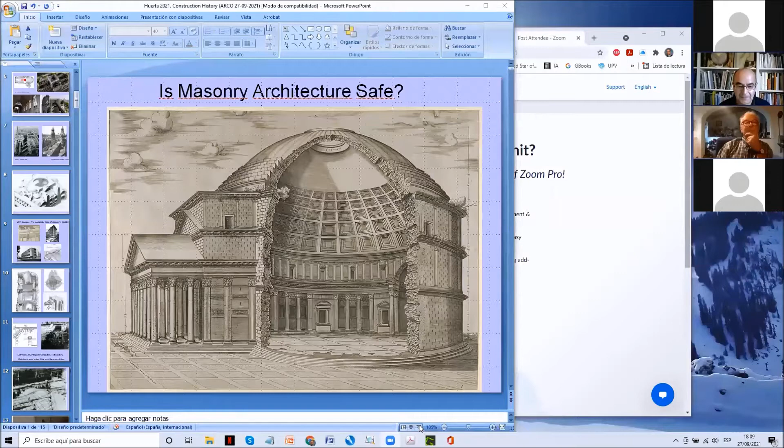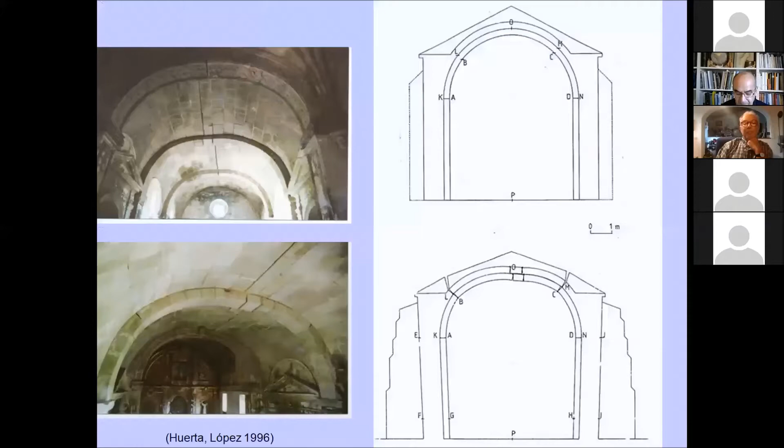Historic buildings have survived for centuries or millennia, and this is an indisputable proof that they are well designed and built. These buildings are robust, and they were maintained with the same materials and methods along history until the 20th century. They have cracked and deformed, and they have withstood earthquakes, fires, and wars. So that these buildings are extremely robust is a historical fact.

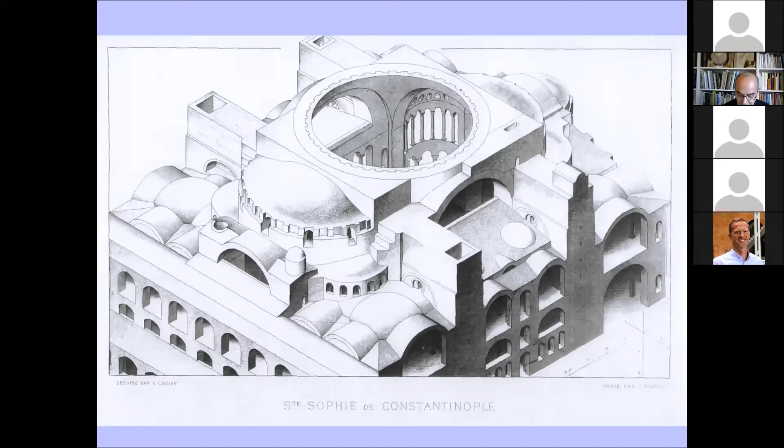However, today, at the beginning of the 21st century, we view these historic buildings, particularly masonry buildings, with great mistrust. Masonry architecture forms a major part of the built heritage, and we should investigate the reasons for this mistrust, which contradicts squarely the historical facts. In my opinion, the reason is the complete loss of the masonry building tradition based on the use of the arch and the vault, which started in the 19th century and culminated in the collapse of the whole tradition in the second half of the 20th century.

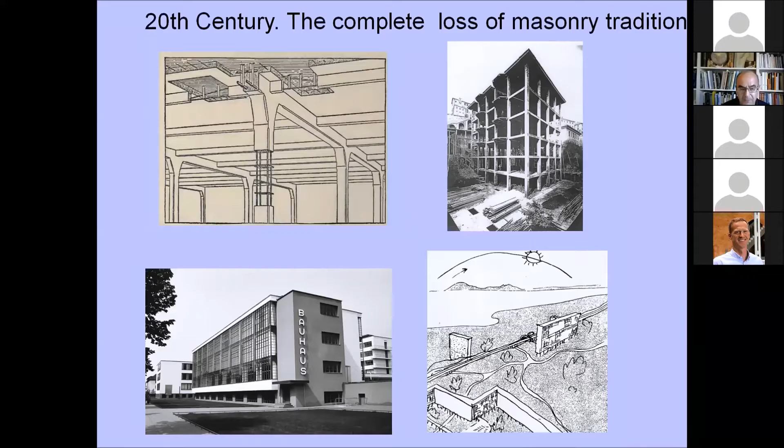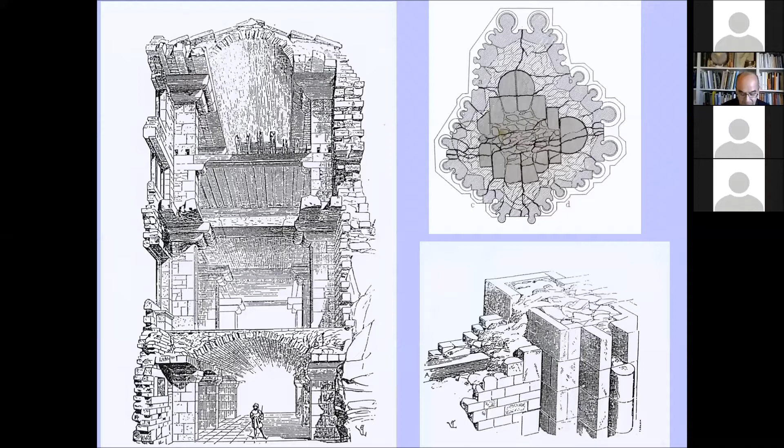The nature of masonry, an orderly stacking of stones or bricks, which is essentially discontinuous and heterogeneous, which does not resist tension, which cracks and deforms in a way that we do not understand now, and which seems therefore dangerous to us, contradicts the framework of ideas associated with modern reinforced concrete and steel structures. Masonry construction seems strange and alien to us. We are ignorant; we do not understand or appreciate the essential robustness of this marvelous construction. Ignorance breeds fear. Fear clouds judgment and leads to wrong decisions. Moreover, fear often leads to an aggressive, defensive so to say, reaction.

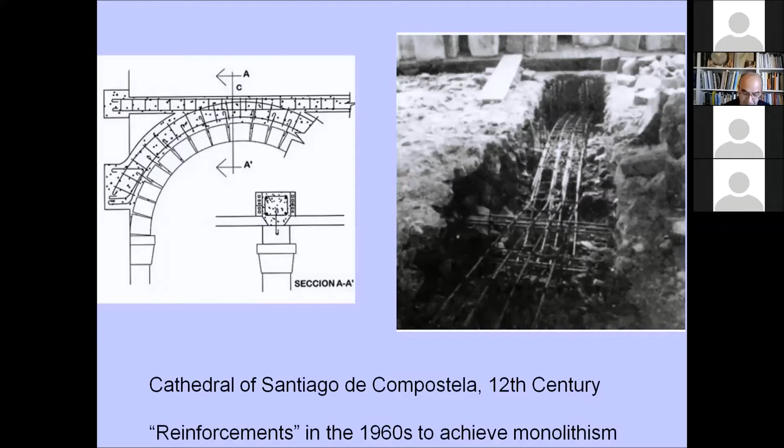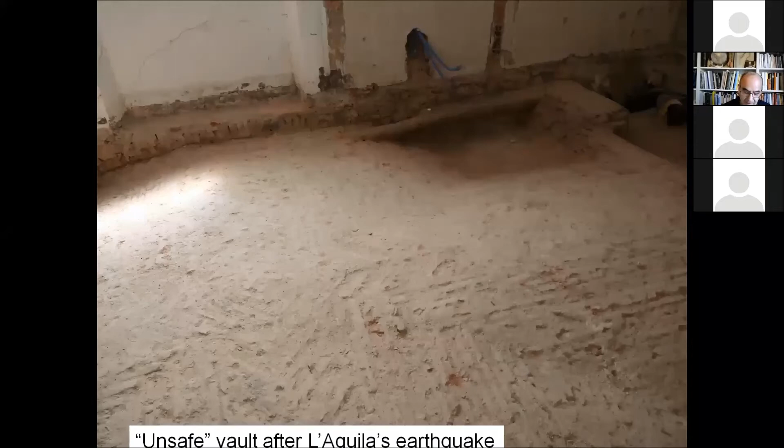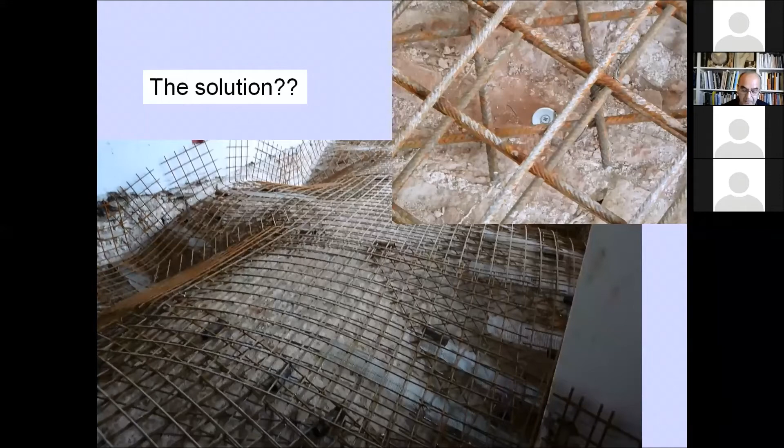Many interventions that are carried out today, often with the best of intentions, actually turn against the monument itself. In reality, the modern architect or engineer unconsciously wishes that the historic structures were made of reinforced concrete or steel, or perhaps now of carbon fiber. The modern architect or engineer would like to prevent the natural cracking and movement of the masonry, to turn the pile of stones into a monolith. Modern interventions seek in vain this transformation, and historic constructions see their essential nature violated by massive interventions of reinforced concrete, steel, carbon fiber, resins, etc.

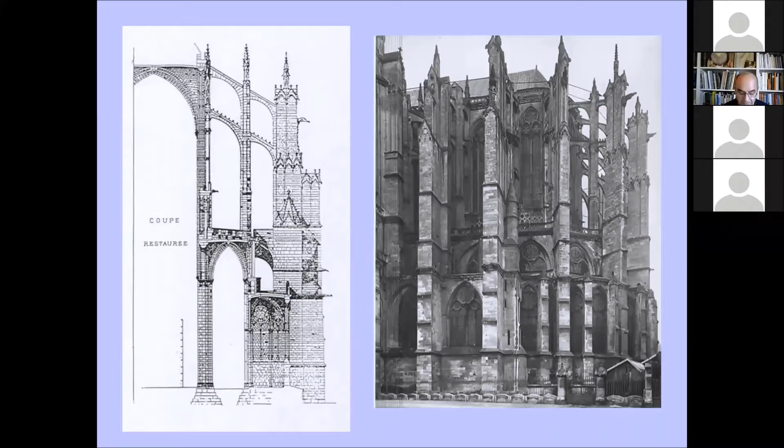I repeat, there is an unconscious desire to transform the masonry, which is the fruit of our prejudice. The prejudice is something which is not questioned. It is in our minds. And this prejudice is that masonry is bad, masonry is dangerous. But as we have seen, this prejudice arises from our ignorance. You cannot preserve what you do not understand. You cannot understand and respect what you fear. And in the last years, many times we have seen that very old structures, some 2 millennia old, like the aqueduct of Segovia, are suddenly collapsing. Maybe the problem is in the head of the architects or engineers and not in the monuments.

We see all too often the consequences of this vicious circle of ignorance and fear, which leads to an aggressive response. Then there is greed for profit and money. Aggressive interventions, besides damaging the monuments, are very expensive and lead to great profits for all those who participate in

them. This cocktail of ignorance, fear, and greed is destroying our monuments, turning them into a sort of Frankenstein's monster. One wonders what will be left of them in 100 years. Will there be any buildings that have been spared these strange aggressions that violate their very nature?

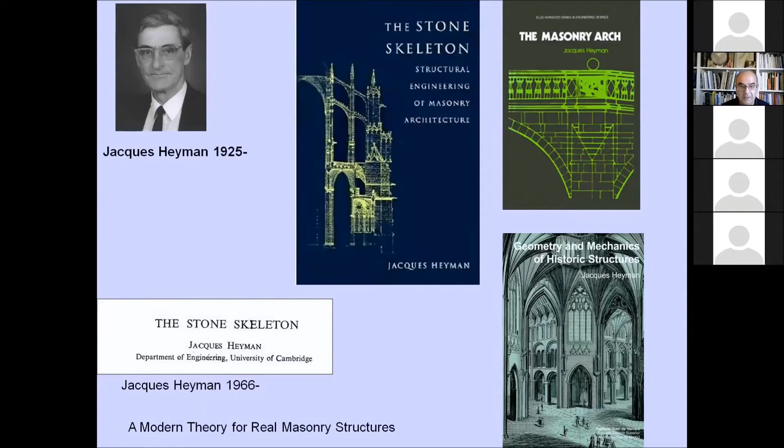But how can we analyze, for example, a great Gothic church if we do not know how it was planned, how it was built, what geometrical rules were used in its design, how its walls were erected, how the stones were chosen and the mortars fabricated, how it is founded, etc. You cannot analyze a historical construction without knowing the history of the construction.

Architectural history books abound, but they say little, if anything, about how buildings were constructed. The history of building technology is, in my opinion, essential to complete our vision of historical architecture, and essential to be able to make progress in recovering the knowledge lost along the 20th century. In what follows, I will very briefly explain the origin of this discipline of construction history and its current state.

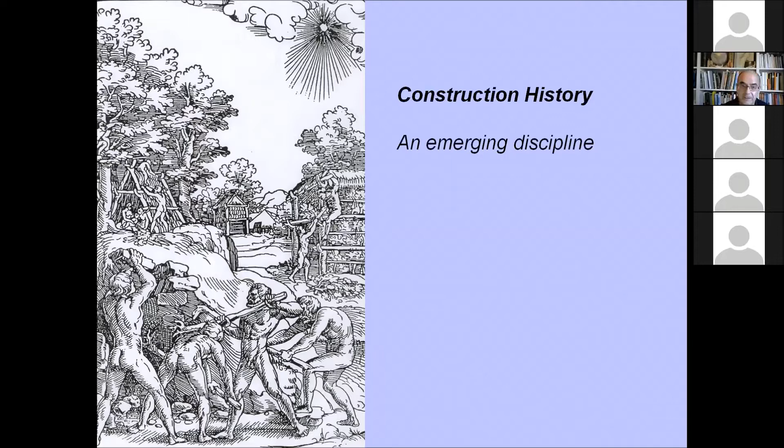Since the beginning of architecture, in every time there was an interest in knowing the methods of construction of previous builders. Vitruvius is based on previous Greek manuals. Brunelleschi, before building his great dome, studied in great detail with his friend Donatello the Roman ruins in Rome. Alberti also gathers a lot of the medieval tradition which was compiled before him.

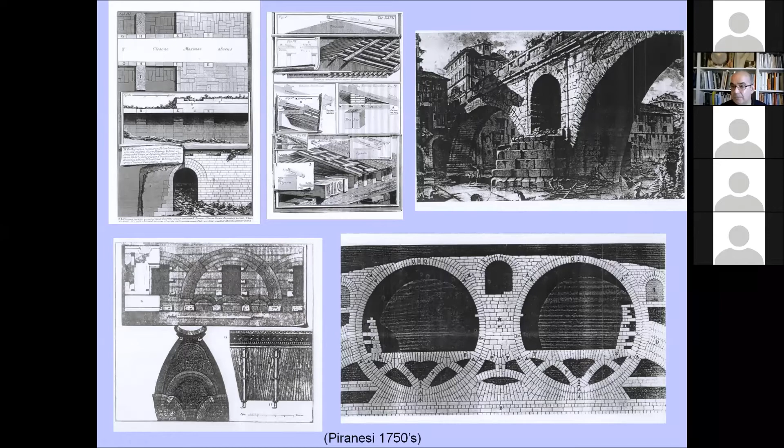One of the first to make more or less right drawings of the Roman concrete was Rusconi, who explained for the first time the stratified nature of the Roman concrete. Piranesi, both of them, father and son, tried to explain in some of their drawings the internal structure of the monuments. Sometimes they invented things. For example, they invented the arches inside the dome of the Pantheon, which we know now don't exist. Terenzio in the 1930s proved that. Also, this structure of the foundations of this Roman bridge is fanciful. But at least Piranesi tried to imagine or to understand the structure of these monuments.

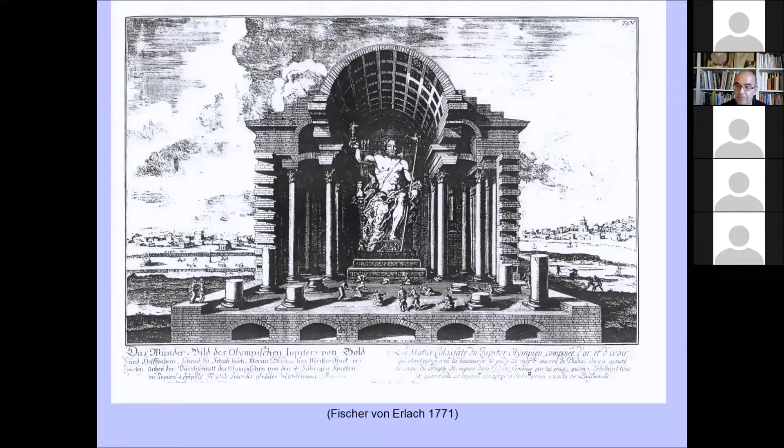Fischer von Erlach, at the end of the 18th century, in what is considered the first book on the history of architecture, made drawings in which we see the same attempt to imagine the internal construction of the monuments. It is along the 19th century that all this tradition is compiled in different manuals, which now constitute an authentic treasure to study the old traditions of vaulting. First, Rondelet, 1802, Traité théorique et pratique de l'art de bâtir. It is also one of the first books which contains whole chapters on the history of construction.

Robert Willis, in 1842, made the first scientific and rigorous study of the geometry of the vaults of the Middle Ages. Viollet-le-Duc dedicated all his life to the study of medieval construction with a zeal and intelligence which is difficult to imagine. In Germany, not so well known, Ungewitter also wrote a handbook of Gothic construction with a detailed description of all Gothic construction in the German area.

And noteworthy also are the additions made by Karl Mohrmann, professor in Hanover, who in the third edition of Ungewitter's manual included almost 200 pages on statical analysis of the Gothic structure, which constitute, from my point of view, still today the best study of the equilibrium of Gothic structures. And also, it is necessary to mention Choisy, L'Art de bâtir chez les Romains, the Byzantines, the Egyptians, and Joseph Durm, Die Baukunst der Griechen, Die Baukunst der Etrusker, construction in Greece and Rome.

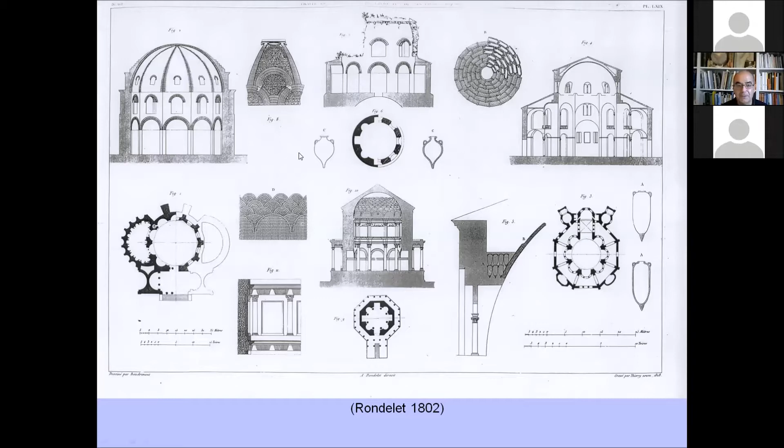Here is one of the plates of Rondelet, showing, for example, the structure of the dome in Ravenna, or repeating the mistake of Piranesi, showing these internal ribs in the dome of the Pantheon, which do not exist, the Temple of Minerva Medica, etc.

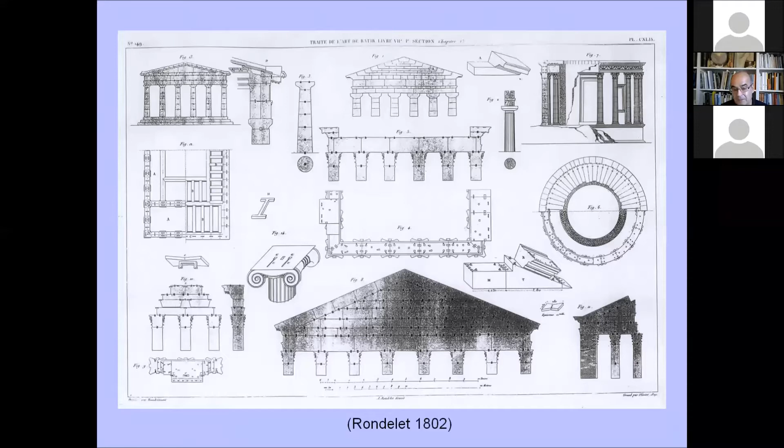This plate also shows the use of iron in the Greek and Roman temples to join the stone blocks so that they wouldn't slide, probably during the earthquakes.

As I said, it was Robert Willis, who was an engineer, a scientist, and the best architectural historian in England in the 19th century. It is worth reading today, more than reading, studying, because it is quite difficult to follow the arguments of Robert Willis with all his analytical drawings full of letters and signs, etc.

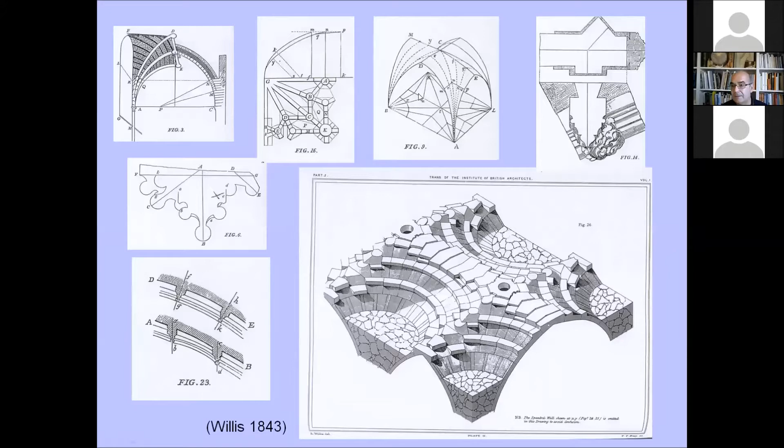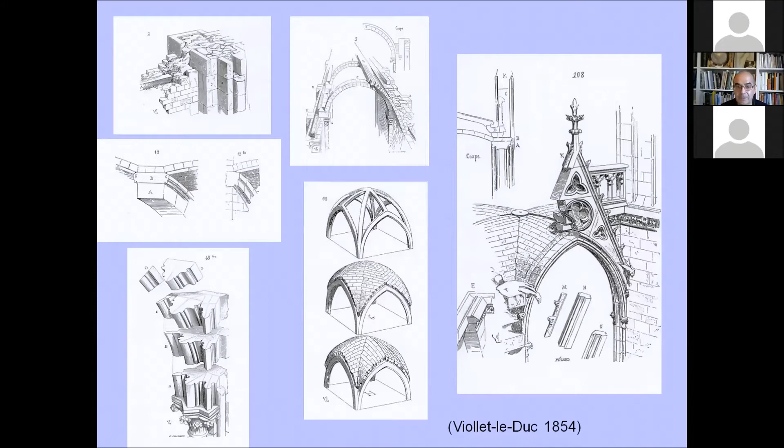And then, of course, Viollet-le-Duc, the most famous of all the construction historians in the 19th century, with his wonderful analytical drawings. Choisy was the first, in 1873, who stated clearly his objective. His objective was to explain the internal structure of the Roman constructions.

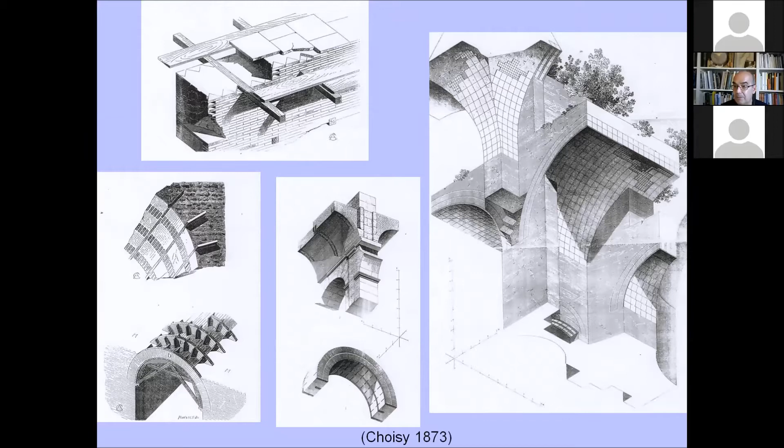And the ideas of Choisy are now common knowledge. Choisy is no longer quoted by archaeologists because the ideas of Choisy have been incorporated in our common knowledge about Roman construction. And Choisy also studied the Byzantine construction with combination of vaults built without centering.

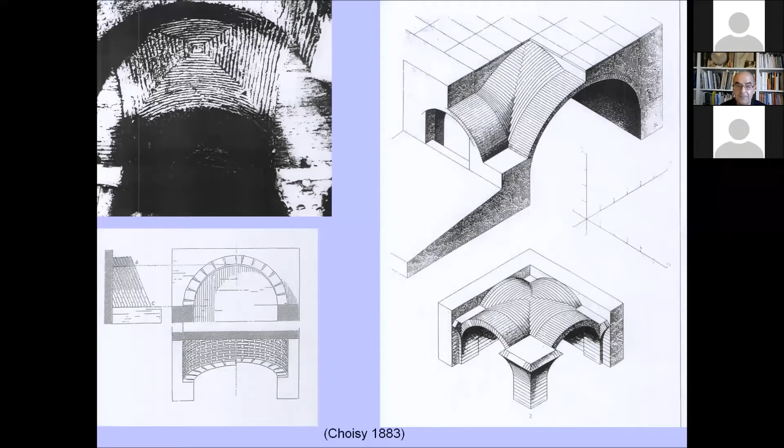Joseph Durm, a Bavarian architect who was interested in the classicist approach. He traveled to Greece and Rome and made these analytical drawings, which explain much better than any photograph the findings and the interpretation of the findings.

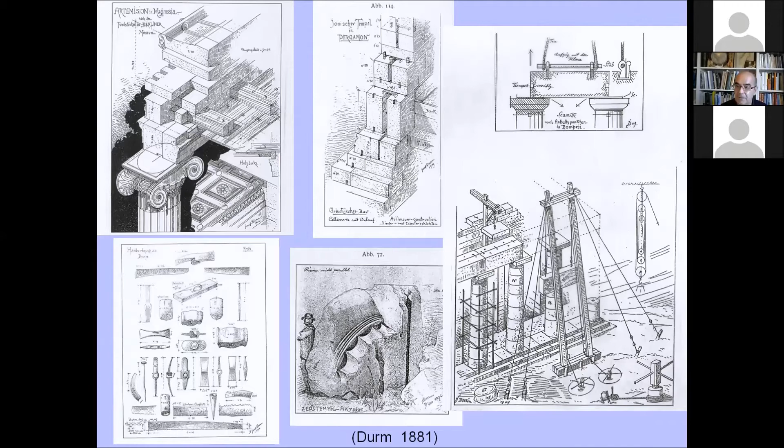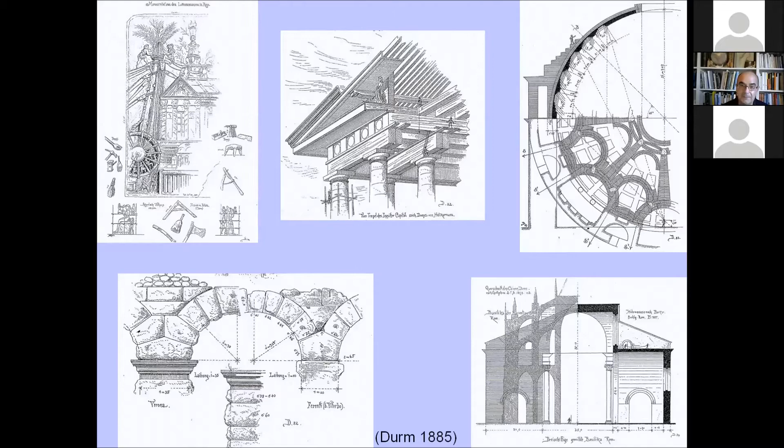Durm also explained the structure with these wonderful drawings of Santa Maria del Fiore, St. Peter's, the Baptisterium in Cremona, in Florence, etc.

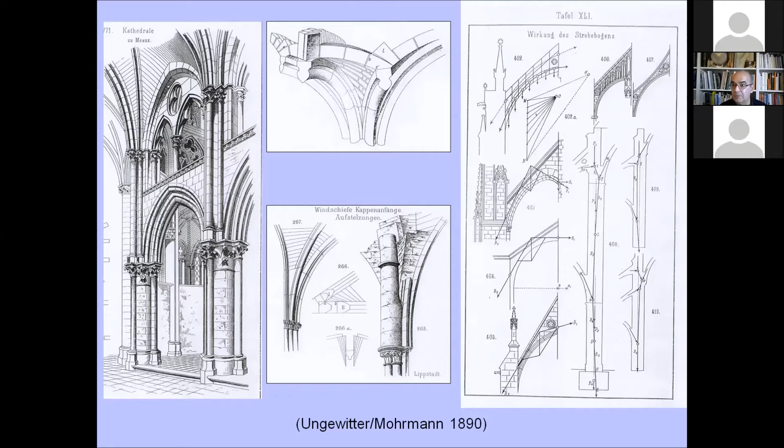As I said, in the third edition of Ungewitter's Handbook of Gothic Architecture, he added almost 200 pages of the third volume to the study of the equilibrium of Gothic structures. And within the frame of modern limit analysis, we know that this approach of equilibrium is completely correct.

We know that this tradition was disappearing during the 20th century, particularly after the First World War. But the traditions don't want to die so easily, particularly the old professors don't want to die, and they want to teach the same things they were teaching maybe 20 or 30 years before.

We have a document in the School of Architecture, which is the notebook of Luis Moya, a notable architect, from when he was a student. This notebook has been preserved, and we found in it the drawings he copied from the blackboard by his professor Carlos Gato. And here we can identify almost every single drawing from Durm, from Viollet, from Choisy, etc.

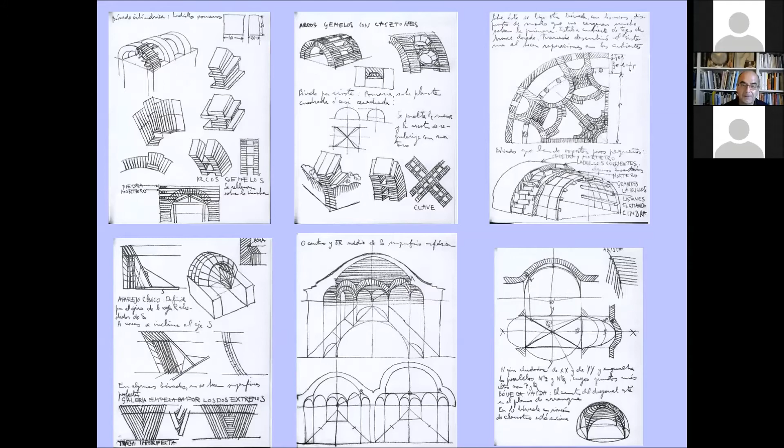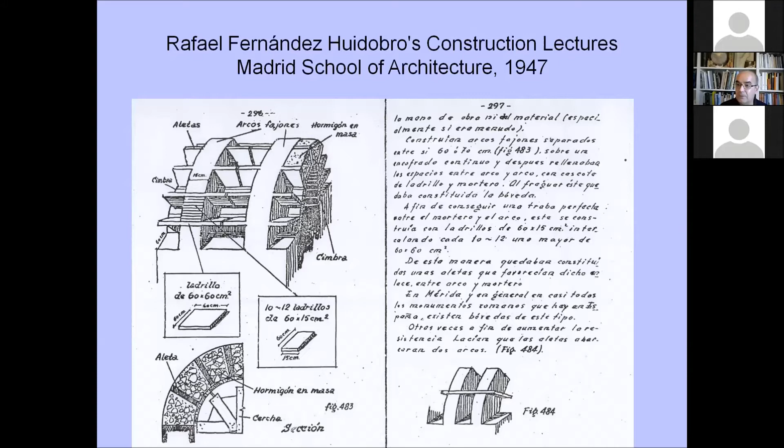After the Spanish Civil War, in 1947, a young architect, Fernández Huidobro, obtained the chair of construction, and the notes for his lectures have been preserved. In his notes of 1947, we see again the same drawings of the tradition of vaulting structures. Of course, in the Spain of Franco, this kind of vaulted construction was considered by the regime nicer or more adequate than modern architecture.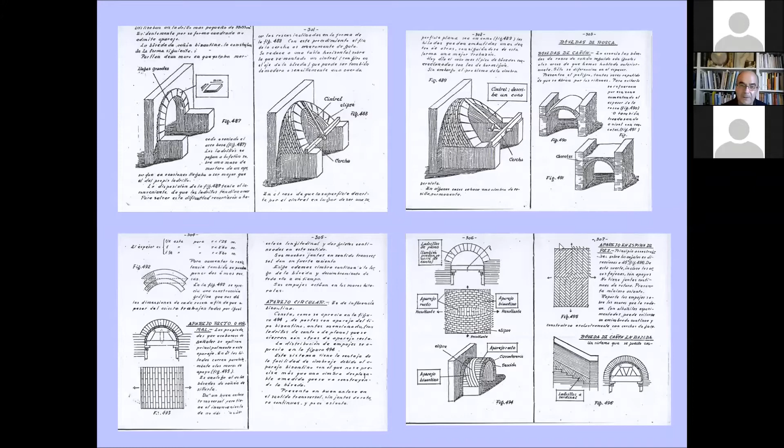The same professor, Fernández Huidobro, in the 1970s, renovated his lectures, and he maintained the teaching of the construction of vaultings after the models of Choisy and Viollet, but he incorporated also the new structures, membranes, shells, etc.

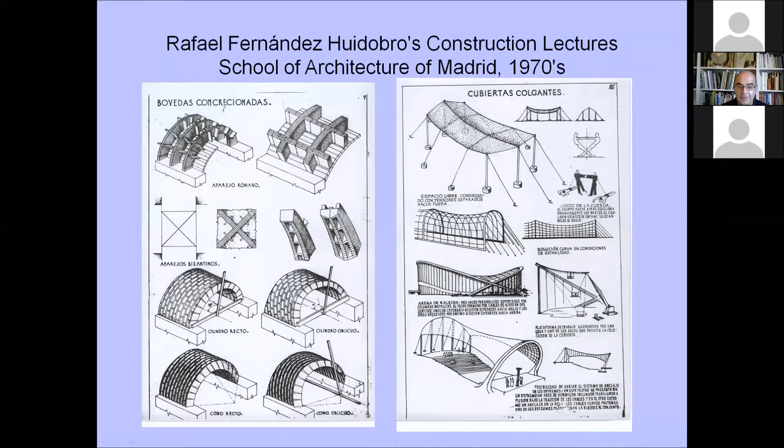So along the 20th century, in spite of the predominance, the absolute dominion of the new materials, reinforced concrete and steel, and the new structural types, frames, beams, this interest in the history of construction is maintained. For example, in books on the history of technology, there is always a chapter on building construction, on building history.

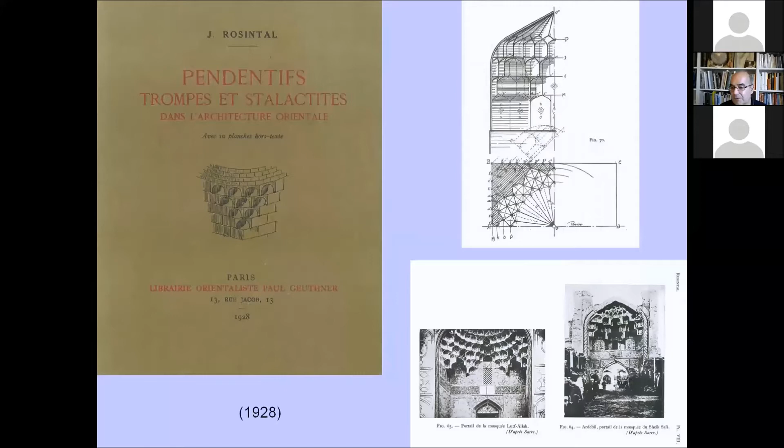In the 1920s, some architects published booklets, for example, on the medieval builder and his methods, 1920, or some archaeologists indeed made particular researches on particular elements, pendentives and squinches in Islamic architecture.

In 1934, Pol Abraham, a remarkable architect of modern architecture in France, presented a dissertation in Paris about the rationalism of Viollet-le-Duc. This dissertation was a frontal attack on the theories of Viollet-le-Duc.

But what is interesting in the context of this lecture is that still in the 1930s there was an interest in the medieval theories. But this interest was now not on the part of architects who wanted to build this kind of structure like in the 19th century, but from the point of view of the curious researcher.

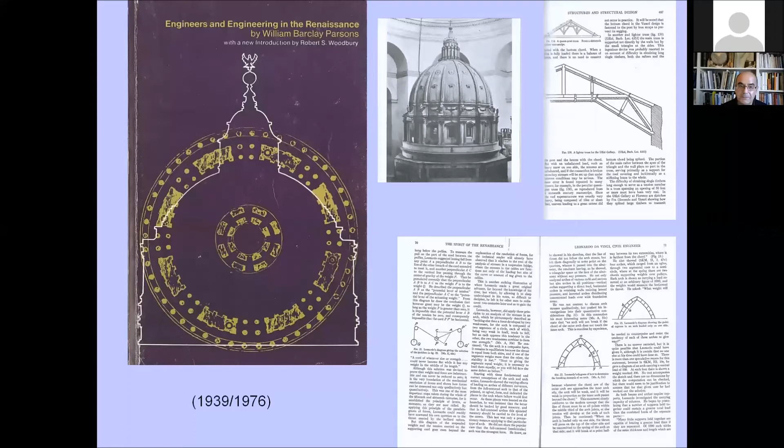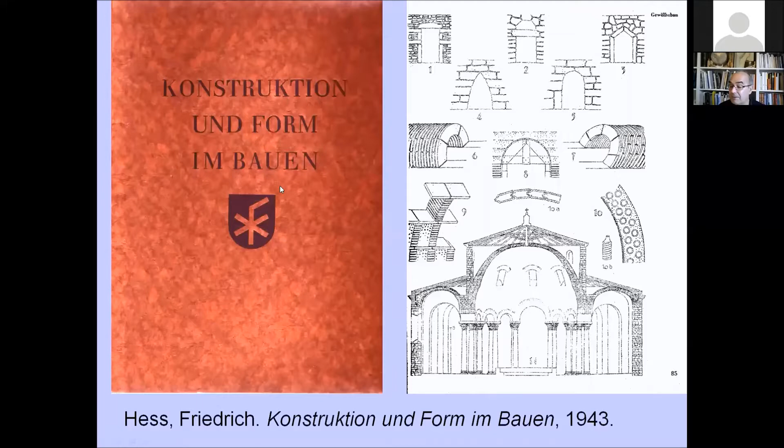In Germany, during the war, well, not in Germany, Friedrich Hess was professor in Switzerland, at the ETH. Friedrich Hess was one of the not few architects who considered that it was better to maintain the traditions and to forget Le Corbusier and Bauhaus, etc., and he published this book, Konstruktion und Form im Bauen, Construction and Form in Building, which, by the way, was translated and published in Spanish also a few years later.

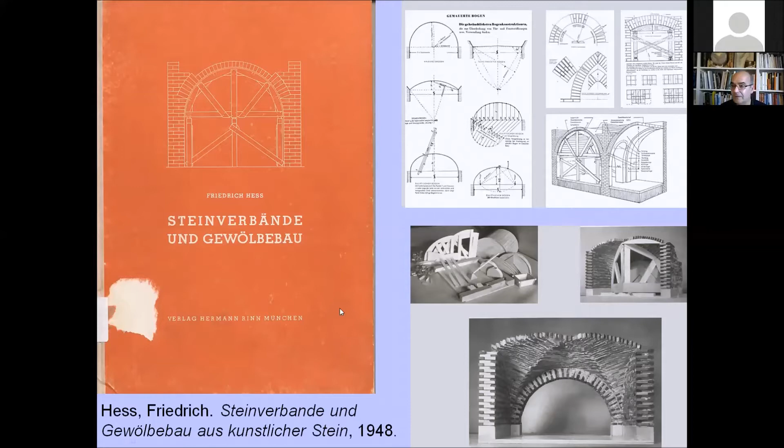Then he published a second book on the building of vaults, and the second book had the intention of encouraging the students to build vaulting models, so to maintain in some way the tradition of vaulting. In 1948, this was absolutely out of fashion.

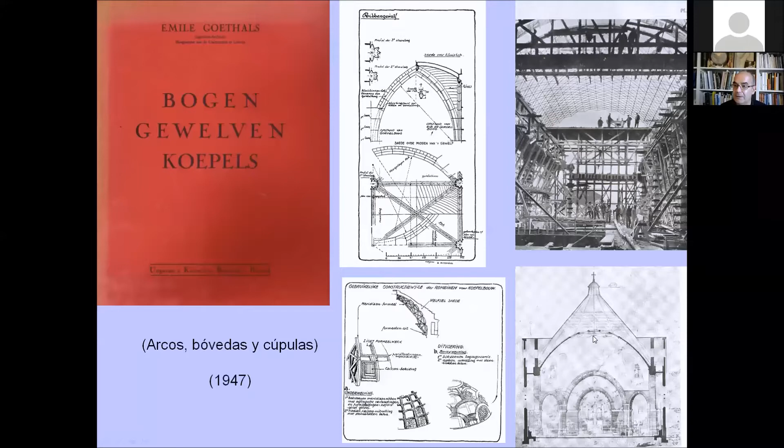The same in the Netherlands. Goethals published a book on arches, vaults, and domes. And he studied not only the medieval or the Renaissance or Roman vaults, but also the modern constructions, the modern thin shells built by Dischinger in Germany, or the modern designs with domes built in the 1930s in the Netherlands.

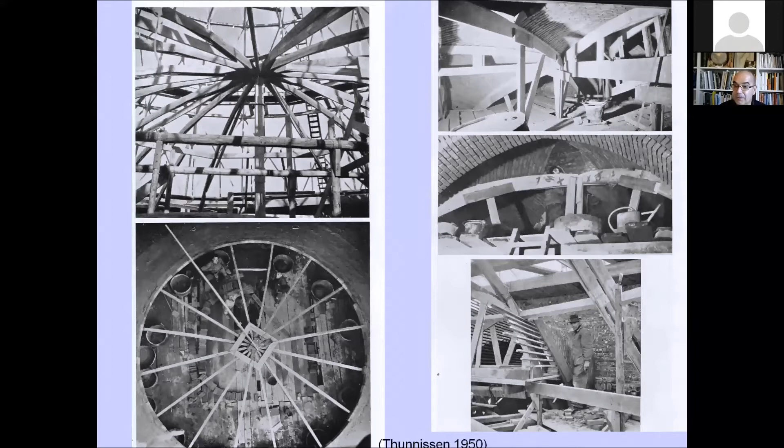In the same way, in Spain in 1947, the time of the autarky, when Spain was isolated from the rest of Europe, and it was completely destroyed. Well, not completely, but with a great amount of destruction after the Civil War. This tile vault was recovered and reused in the rebuilding of many buildings, in restoration, but also in the rebuilding of whole villages.

And Luis Moya Blanco, the same young student who was copying these drawings of Choisy in the 1920s, now was an important architect with a very good relationship with the government of Franco, and he built wonderful buildings with vaults. For example, the Universidad Laboral de Gijón has an oval dome whose great axis is almost 40 meters. And he published this book, The Construction of Tile Vaults.

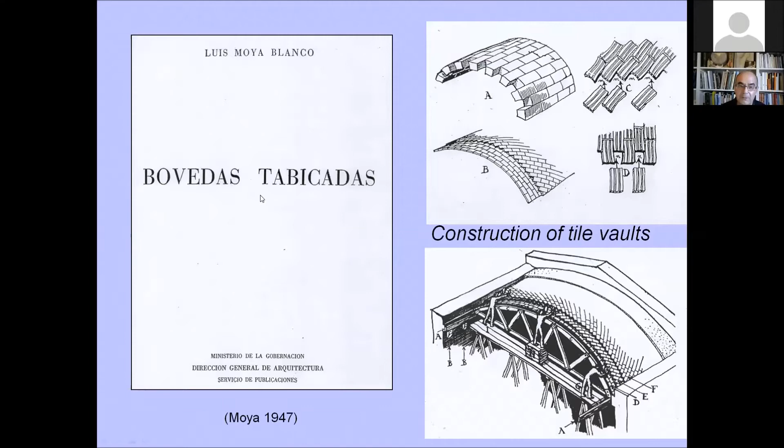At the same time, in England, this book was published, and if it was published, it was because the editors thought that maybe someone would like to buy the book. Cathedrals and How They Were Built, very elementary, again copying drawings of the previous century.

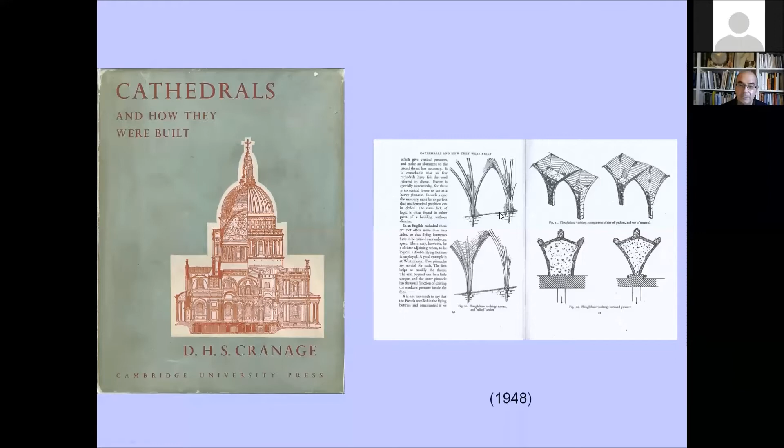1949, Hans Straub, a German engineer. This is another war book. He confessed in the foreword that he was working on the book during the impasse of the war. The book was published very shortly in English, A History of Civil Engineering, and it is still one of the best handbooks for students or non-students who are interested in an overview of the history of building construction.

In 1953, Timoshenko, a Russian professor who fled from the revolution and eventually established himself in the United States and produced a series of manuals which are the basis of the teaching of structural theory even today, published this book, History of Strength of Materials, which is much more than that. It is a history of structural theory.

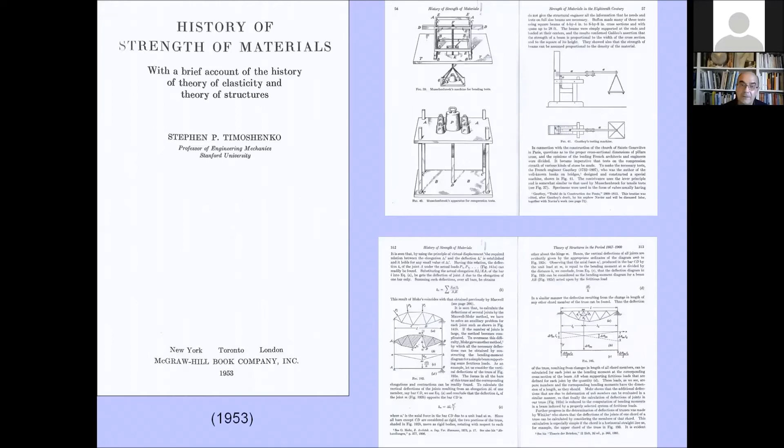Archaeologists continue to study and to publish books with an interest in construction, trying not only to register but to understand and interpret the findings. This book, in two volumes by the Greek Orlandos, was published first in Greek and afterwards in French. It is still today a wonderful book to prepare a lecture, for example, on Greek construction.

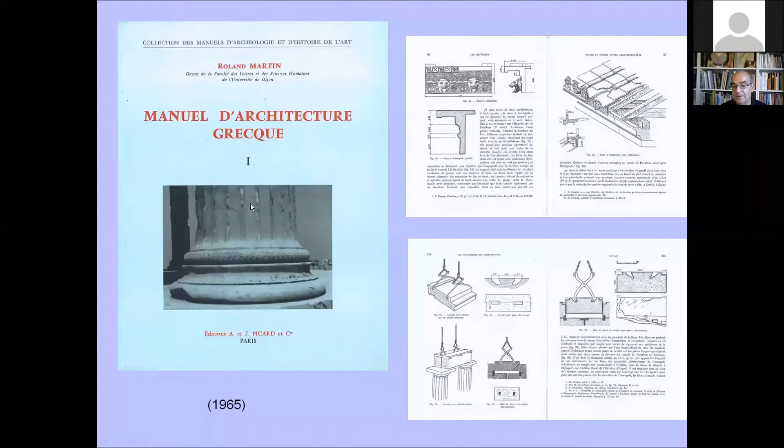And the same with this Martin, Manuel d'Architecture Grecque, published a few years later. It is also an excellent handbook for understanding Greek construction. In Italy, there were also many books published. Maybe one of the most important is this by Lugli, La Tecnica Edilizia Romana, two volumes, a massive work explaining the construction of Roman buildings.

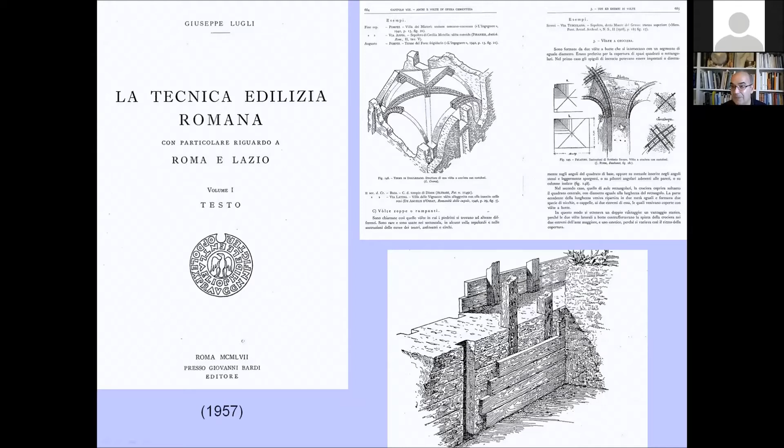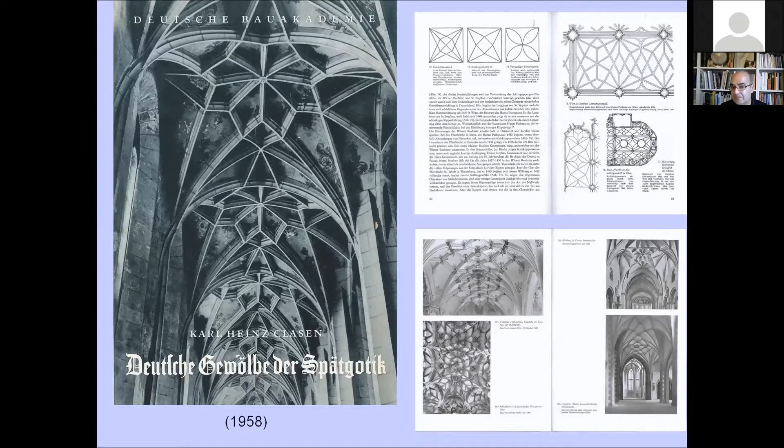And we can recognize here again the drawings by Choisy and Durm, no? This is curious because here in this figure he put "after Durm," but it is after Durm after Choisy. Durm copied Choisy, and now Lugli reproduces Durm, maybe without knowing that Choisy made this drawing before. The interest in medieval vaulting, the construction of vaults and the geometry was also maintained.

It is interesting in Germany. There were some publications which were financed by the building companies, and this is the case of this journal, Heraklith Rundschau, which was published by this company of construction materials. And we see that in the 1950s, some of the booklets they published included many topics of construction history. For example, this first elevator. And another German published a thick book compiling all the drawings made about the construction of the Tower of Babel.

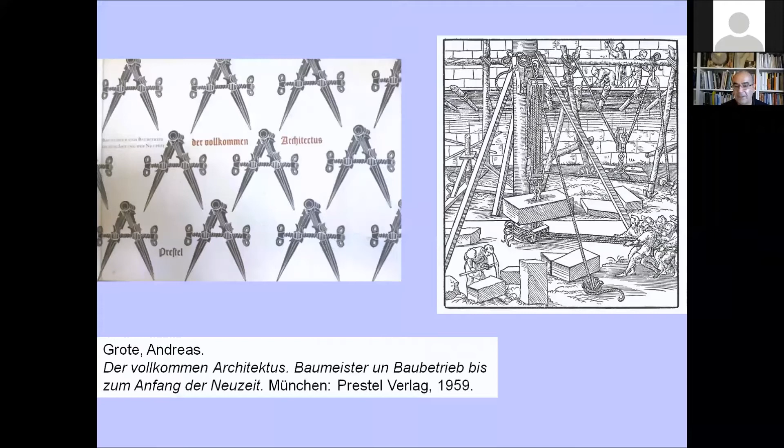At the same time, 1950s, 1960s, in Germany, there was this book, The Perfect Architect, Builder and the Organization of Building in the Middle Ages. A History of Building Materials in 1961. And this book, which is still in print, John Fitchen, The Construction of Gothic Cathedrals. An important book with maybe some hypotheses which are not sustained sufficiently, but in any case, a wonderful book.

Maybe Fitchen was the last one who studied Viollet-le-Duc. So it's full of references to Viollet, etc. For anyone who wants to go in depth into the building of Gothic, this is a must. You must have the Fitchen and at least read it in part.

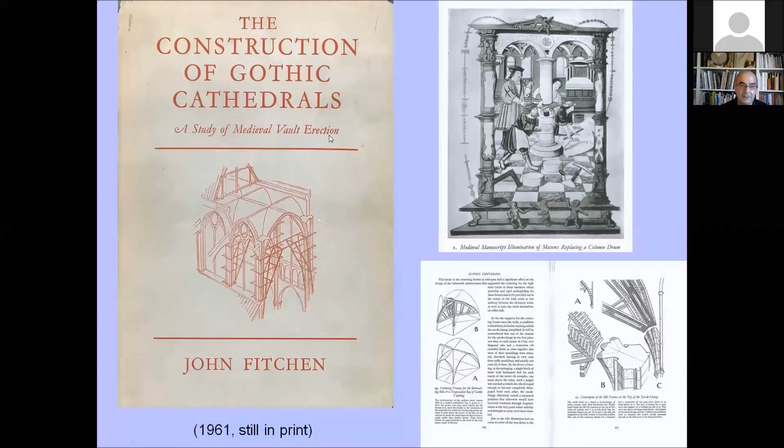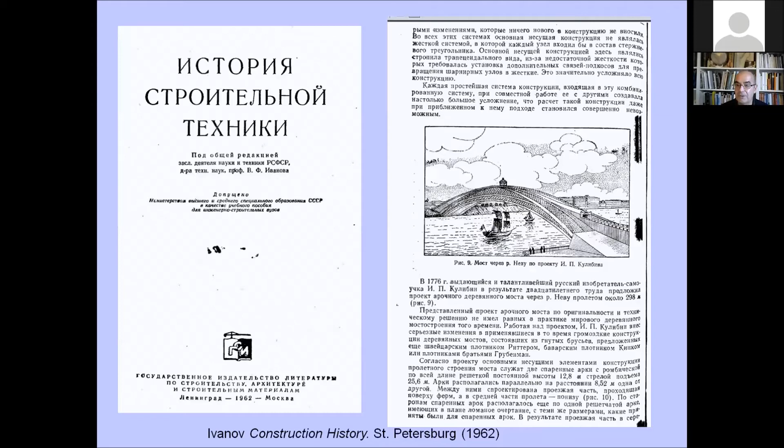This is a recent discovery. In the 1960s, 1962, a group of professors in the Faculty of Architecture in St. Petersburg published a book on construction history, a book which is extremely interesting because it includes some parts of the history of construction, particularly after the Russian Revolution, which are almost completely unknown to Western scholars.

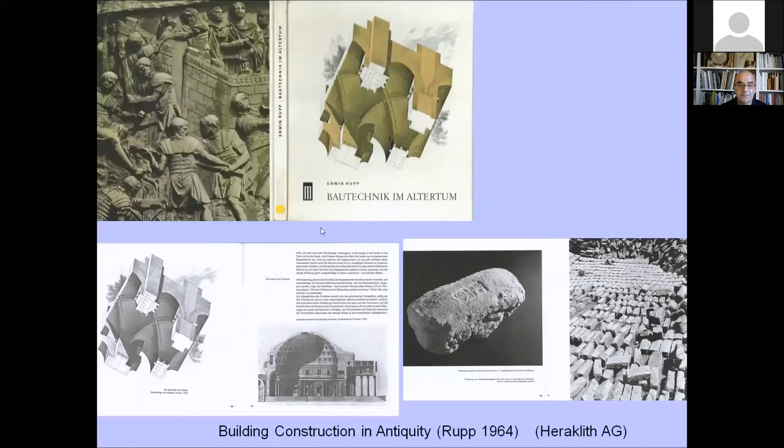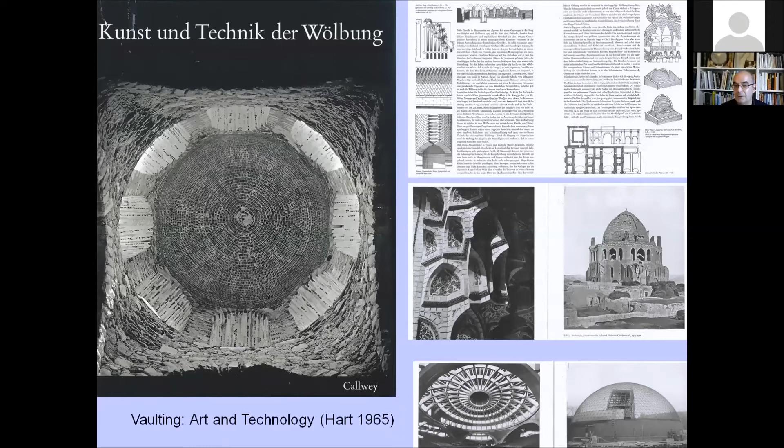The same author wrote this book, Building Construction in Antiquity. And also in the 60s, Franz Hart published this book, The Art and Technique of Vaulting, which is also a gift book. Not only the history of masonry, but also in the 1960s, one of the first books on the history of reinforced concrete and pre-stressed concrete. This book by Haegermann and Huberti is again a must for anyone interested in the history of early applications of reinforced concrete.

In the Netherlands, the most complete compilation of medieval illustrations on buildings was made by this woman, Frieda van Tyghem, in 1966. It is in Dutch, unfortunately, but the second volume is of plates, and it is the best compilation of plates extracted from codices, Bibles, etc. And in the 1960s, Henry Cowan, a Jew who fled from Europe.

His original name was Cohen. He changed the name during the Second World War to Cowan, because he fought against the Nazis, in case he was captured by the Nazis. They compelled the Jews to change their names. Cowan emigrated to Australia. In Australia, he founded the first department of architectural science.

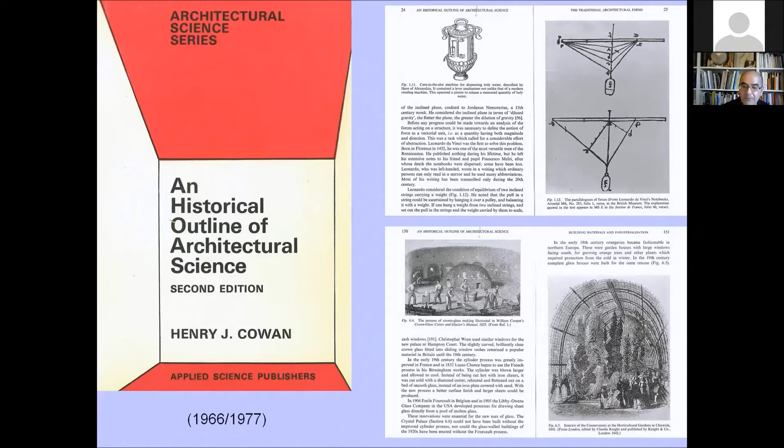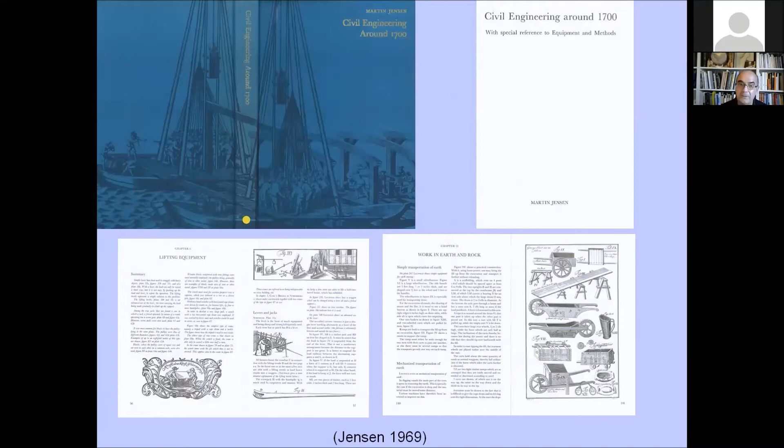Then, at the end of the 1960s, another book about the history of engineering, compiling different contents and illustrations taken from the traditional manuals of Belidor, manuals of the 18th or 19th century, which now are on the internet. But then it was very difficult to have access to this information. In France, Jean-Baptiste Ache published Éléments d'une histoire de l'art de bâtir, which is more about the history of architecture than the history of construction, but in any case, the selection of the title marks this tendency, this new interest in construction history.

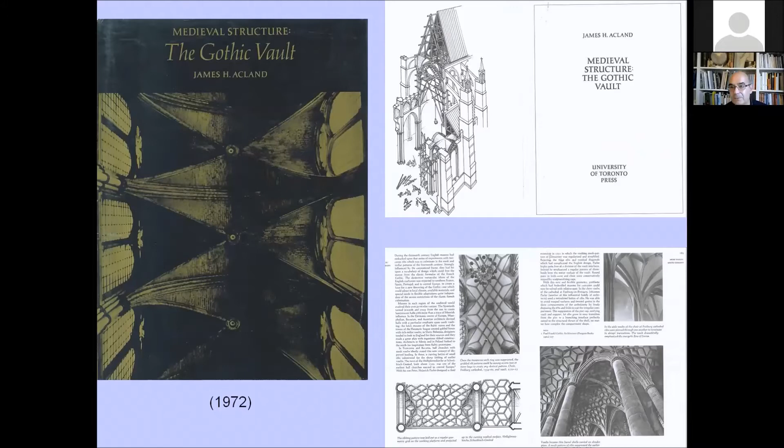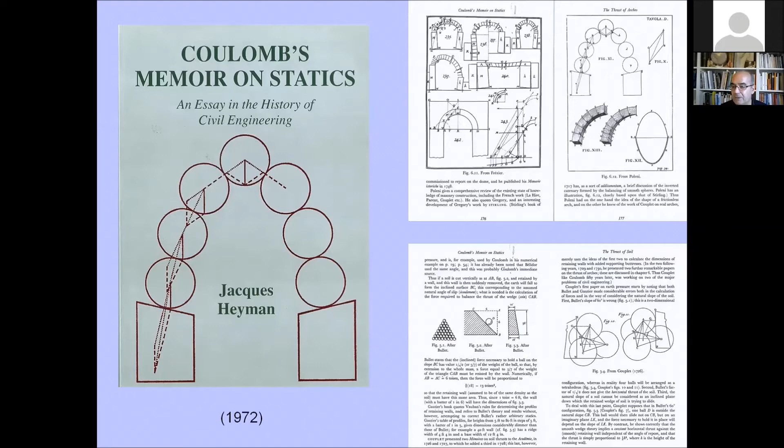Acland, published in Canada, in Toronto, again, a very good book on Gothic construction, which should be consulted by anyone who has an interest in this topic. And in 1972, Professor Heyman published his essay on Coulomb's memoir on statics, which goes much farther than the simple publication and translation of the memoirs by Coulomb.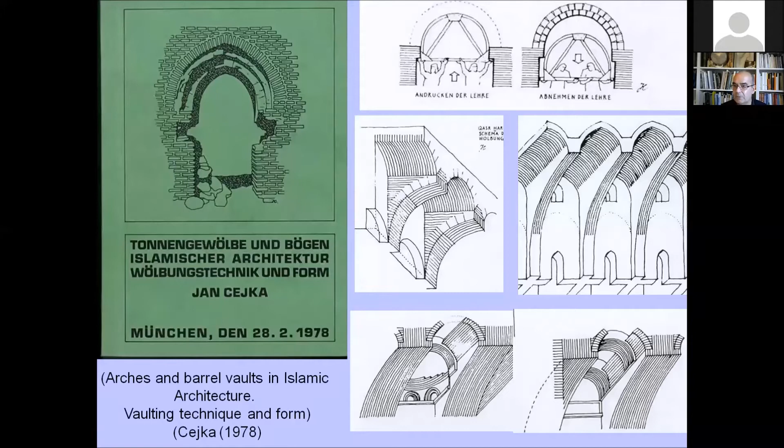Some others were interested. I will cite briefly a few. Tom Peters in ETH published a book on transitions in engineering, and then he went to the United States and published this book, Building the 19th Century, which is again a very good book. The production of dissertations continued, concentrated on particular aspects. For example, this book by Jan Cejka, Arches and Barrel Vaults in Islamic Architecture, is a wonderful compilation on a topic which is mostly unknown. We know very much about Roman vaulting or Gothic vaulting, but we know almost nothing about Islamic vaulting.

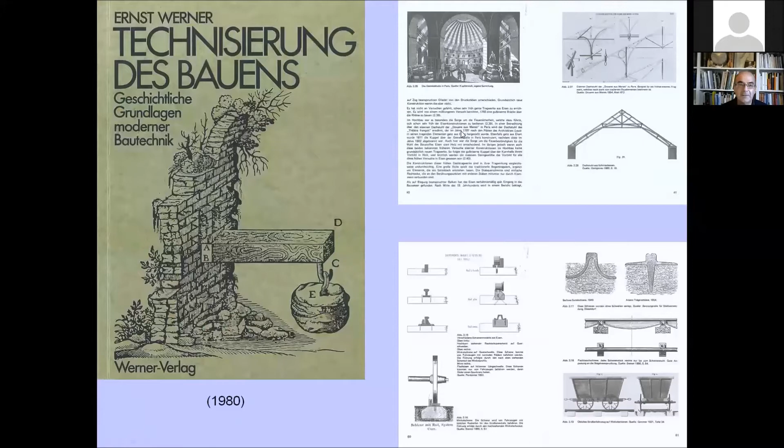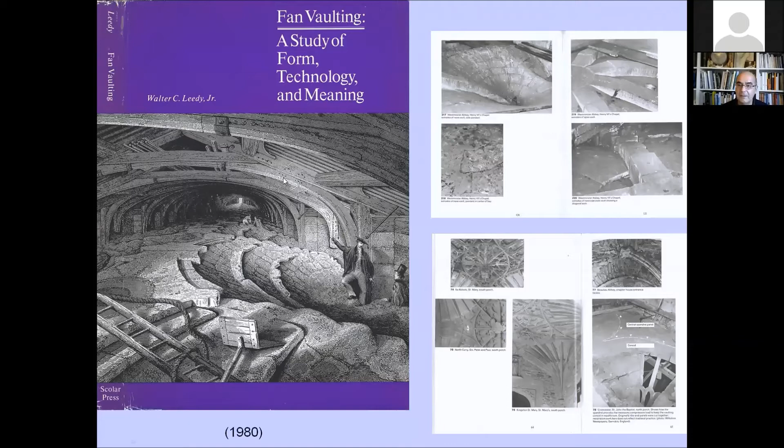In the Deutsches Museum, they published this book, Am Anfang war der Balken. At the beginning, there were the beams, and it is another popular book on construction history. Another German, the technification of building, 1980, or another dissertation published as a book, a study of fan vaulting, a study of form, technology, and meaning, in 1980. In Italy, of course, we must cite Edoardo Benvenuto, who made an enormous task in promoting the history, in particular of the theory of structures, but also of construction. La Scienza delle Costruzioni is a classic book.

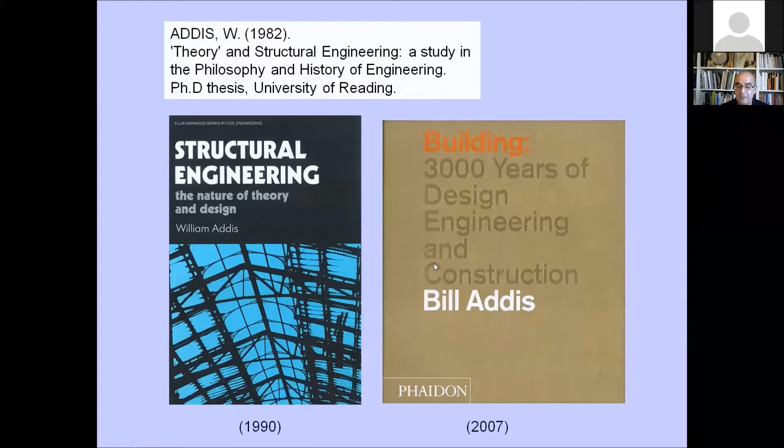And the first colloquium on the history of structures was held in Cambridge in 1982, organized by Jacques Heyman. And if we have a look at the list of people participating, we find here Tom Peters, Sutherland, Bill Addis, Mainstone, G.R. Collins, Radok, Charlton, Schleich, the German engineer, etc. Bill Addis published some books on the history of structural engineering, and this handbook, this massive book, Building: 3,000 Years of Design, Engineering and Construction, which is, I think, the last handbook which has been published considering the whole of construction history. Again, it is a must for anyone wanting to deliver a course on construction history.

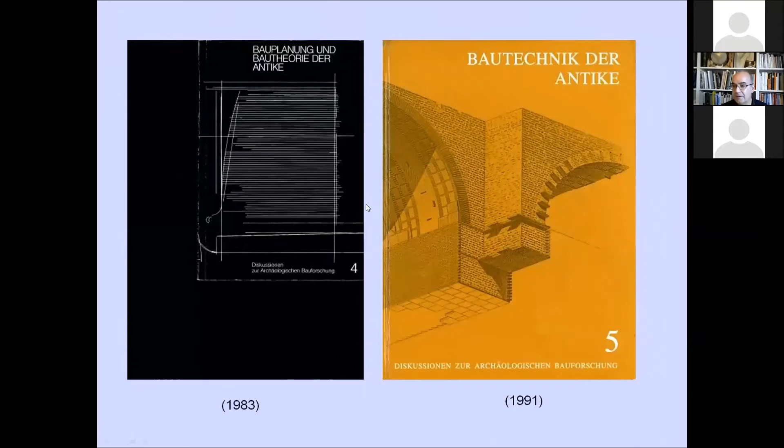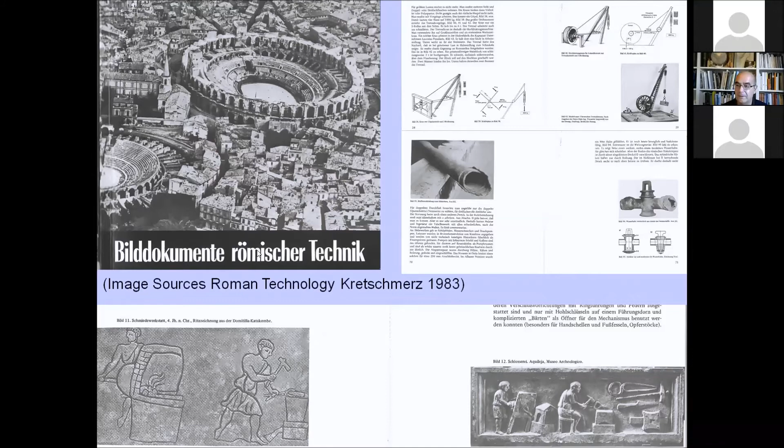Archaeologists continue to publish books on the Bautechnik, that is the technique of building in ancient times. And in the 1980s, 1983, 1984, the first Society of Construction History was established in England, the UK Construction History Society, which began to publish a yearly volume on construction history, which is now the main international journal of construction history and is still published. In Germany, they continue to publish these books, not so much scholarly books, but popular books written by very good specialists. This book by Lamprecht studied in detail the Roman building technology, particularly in Germany, and made strength tests, etc. He even built Roman cranes to test the possible functioning of these machines described by Vitruvius in great detail.

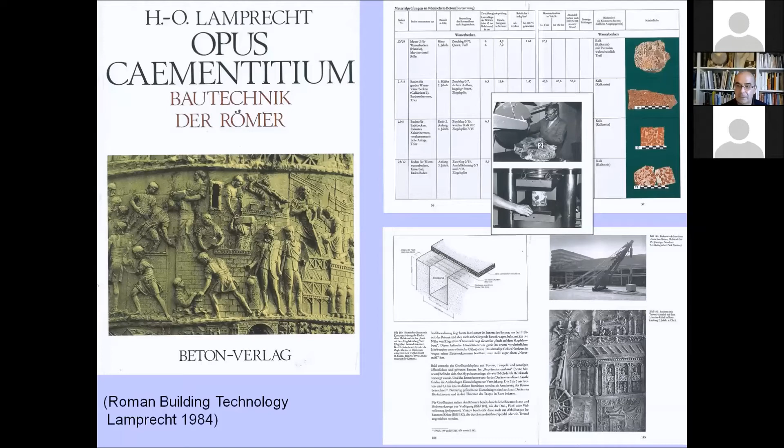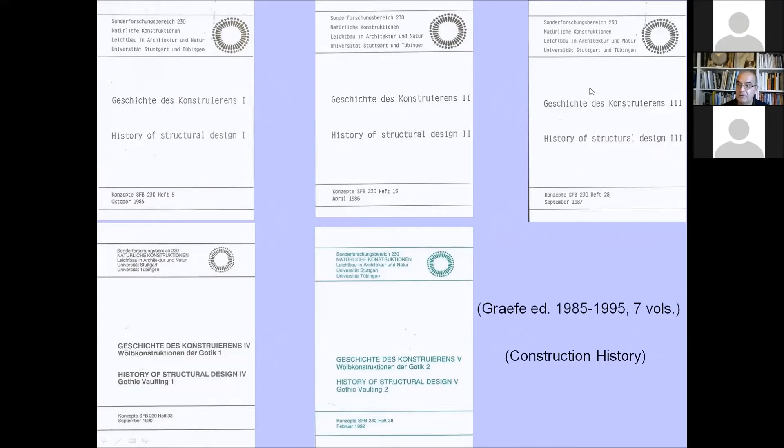Also, in the mid-1980s, within the team of Frei Otto in Stuttgart, in his Institute of Light Structures, some of his disciples, in particular Rainer Graefe, asked for a research project on the history of construction, and they organized symposia and published the corresponding proceedings in booklet format.

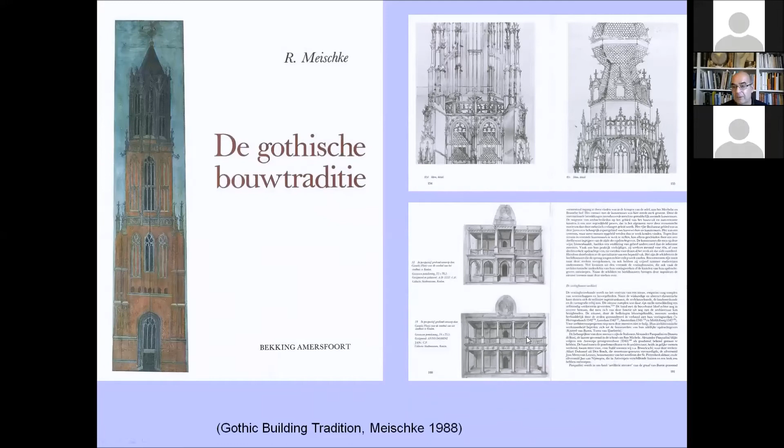In the Netherlands, Meischke published a wonderful book on the Gothic building tradition, unfortunately in Dutch, but the drawings can be understood. Miron Mislin, professor in Berlin, wrote a handbook trying to follow the same path of Straub, the history of building construction, on building technique, and again, independently, on the history of building technology, a series of articles compiled in 2 volumes in 1990.

Sebastian Storz, an archaeologist who was excavating in Carthage, was interested in the construction of vaults with hollow tubes, tubi fittili, and he went so far as to fabricate the tubes and construct new vaults just to understand the process of building with this technique, which is ceramic tubes and gypsum. And these vaults, as seen in the photographs, are built without centering.

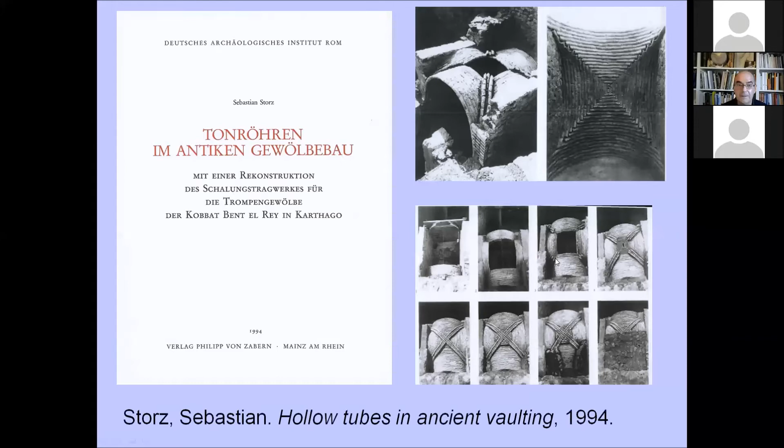In Madrid in 1996, a group of architects and engineers, we decided that it was maybe the time to organize a national congress to see if there was an interest or not in the discipline. The congress was a complete success. It was a surprise. And this was the first of a series of congresses in Spain on construction history, one congress every 2 years, and the last 3 international with participation of American scholars. The first international congress on construction history was organized in 2003, also in Madrid.

And now there is an international congress on construction history every 3 years. This year was the 7th in Lisbon, unfortunately by Zoom, because it was impossible to go there. But in 3 years, in 2024, we hope we could meet all in Zurich, and Stefan Holzer will be the organizer of the 8th International Congress.

In the first decade of this 21st century, there have been a number of international congresses. For example, the Luso-Brasileiro, Brazil-Portugal, 2 international congresses, and also there were conferences organized by the different societies. There is the Construction History Society in the UK, the first, founded in 1980. In 1997 the Spanish Society was founded. In 2004 the French Society was founded, and in 2008 the German Society, and they all organized congresses and published the proceedings in book form.

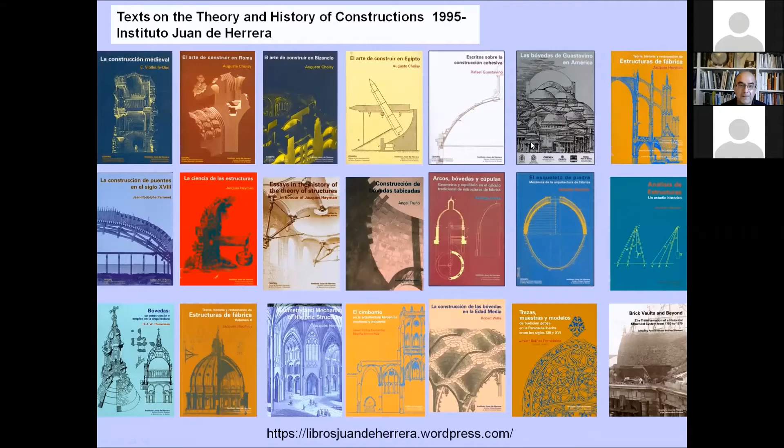There are also some publishers who have series dedicated to construction history. We began in the Instituto Juan de Herrera in Madrid in 1995 to publish a series of books on the theory and history of construction, and we have published so far something like 21 or 22 books. Gargiani in Switzerland initiated a new history of construction, which has published only 2 books by now. But for example, recently, Birkhäuser began a new series on cultural and technical values of historical buildings, which is essentially construction history, and 3 volumes have been published.

And Ernst & Son have also initiated in 2018 a new series with the specific title of construction history. And the first book is by Karl Kurrer, The History of the Theory of Structures, which is, again, a must, the best compilation for anyone interested in the history of the theory of structures. Then Bill Addis has published a massive book of 45 contributions on the employment of physical models along history. Stefan Holzer has, less than 1 year ago, published a book on centering. This is a very little-known topic, and Werner Lorenz, Fedorov and others are going to publish in the next few months 2 massive volumes on the iron structures in the Hermitage in St. Petersburg.

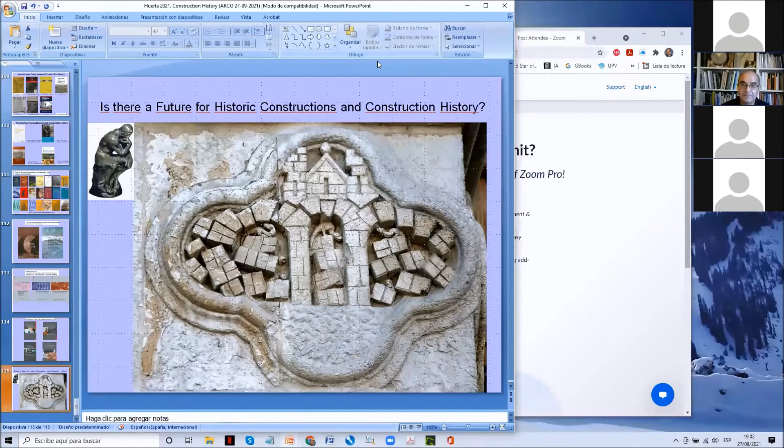Thank you very much, Santiago, for this very nice and beautiful conference. Thank you for sharing with us this wonderful review of treatises of the 20th century, and the passion and the competence that you transmitted to us lead me back to the time when I was a student following Antonino Giuffrè's lectures on statics. That was about the mid 1980s, and it was nice because he was starting to discover and study the treatises on construction.

And I completely agree with you that we really need more room for this discipline in research, in journals, because there is really not enough room in journals. And most of all, we have to go back to teaching these disciplines in our schools, because, for instance, in the School of Engineering, we are less interested in how to build and more interested in how to calculate, but especially for historic buildings, how to build is much more important than how to calculate. So I completely agree with you that this is a very important and strategic discipline in the field of architecture and engineering. So thank you very much.